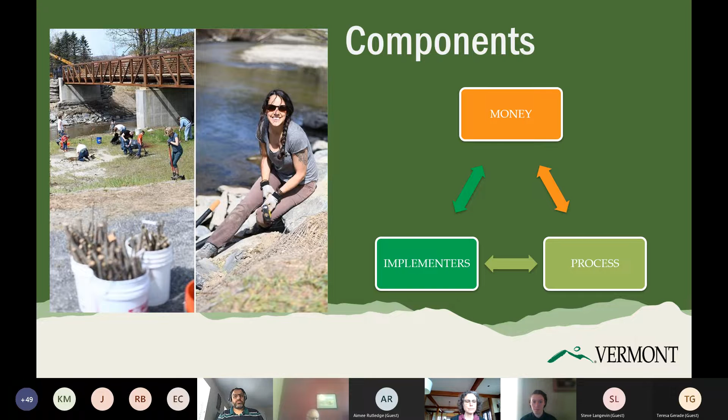Going through the components then: money, we've got that. We've got the Clean Water Fund, and Act 76 ensures it's a dependable source for the next phase of a project. But when it's not enough, the project lead, the implementer, needs to use the award to leverage additional funds. That is happening and has happened. In the accounting, we were able to show that the clean water funds have actually leveraged 50% of its value from other funding sources to add to projects—that's $1.75 million leveraged since the beginning.

You start with assessment of an area known to have high pollutant loading. So you identify the projects, meaning sources of pollution, followed by identifying the best projects and prioritization based on ability to meet the clean water funding goals. The planning includes determining the feasibility of a project idea. Then once that looks okay, you head into design, and from there, grab the shovel—it's time to implement.

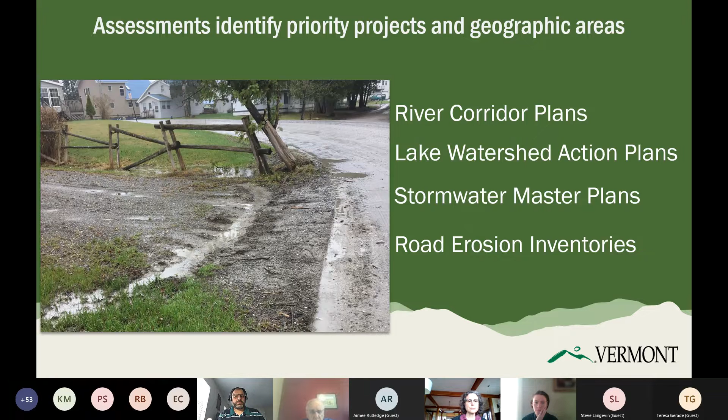All right, let's talk more about the project implementer, who I'm calling the lead now because that's what they are. They are the active party, but they play a role of coordinator because they're working most likely with other entities to ensure they've got all the necessary resources and assistance to address the criteria I identified previously.

Then the other hexagons include technical support, which is anything from additional assistance for permitting to design to implementation. And community connection, which is essential for ensuring that we're going to get a landowner and someone to help support maintenance of the project. Community connections are groups that know what the landowner might need, understand their concerns, and help to address them.

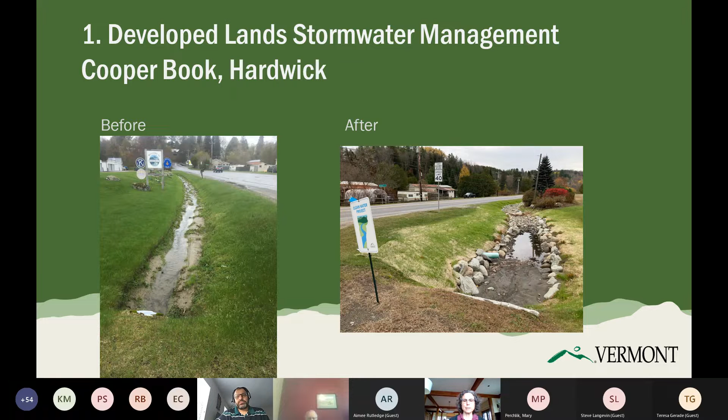First, it was necessary to find partners or work with partners. Here is a list: community connection—they were community connection in themselves, but they were able to connect, and the town in turn was able to encourage landowner interest once their assistance was gained. Then there was VTrans, an engineer, and DEC water planner Daniel Ozarski, who helped with technical assistance. And then financial assistance was, I think, mostly the Clean Water Fund.

So now I'll describe how the NRCD carried the project through to implementation.

The first step in the process: the NRCD led the development of the Hardwick Stormwater Master Plan that identified the project. DEC supported the development of that assessment by providing the template and funding to hire the engineer. The NRCD involved the town in this assessment, which led to their interest in providing additional assistance through to maintenance in this project, and they were also helpful in ensuring that other projects were implemented as well.

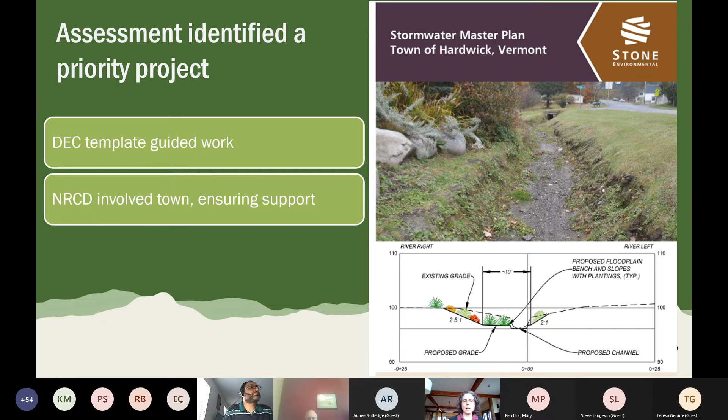The project was identified in the plan as a top priority with high pollutant reductions. Coordinating with the other partners, they needed to develop the project idea from the Stormwater Master Plan to implementation. They hired a consulting engineer to develop the design, which worked off the Vermont Stormwater Manual. In having to consider the landowner's interest, they were able to build trust with the landowner, Carrie O'Brien, who was a conservation district manager at that point, was able to do that through her previous connections.

The private landowner who owned the storage units in the ditch was understood to be concerned with the fact that they were constantly filling up and dumping with sediment, and aesthetics was not something they appreciated, so they were able to be brought in. VTrans, who at one point was supposed to be maintaining the ditch, was also very interested in the project and agreeable to it. The NRCD just had to work with them to ensure that their regulations for working in the right-of-way were met. With everybody improving and benefiting from it, it became a project that could be designed and implemented.

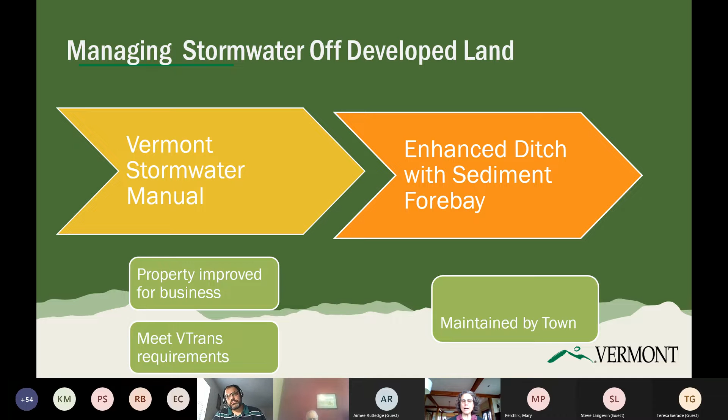The next project is the town forest road BMPs, or best management practices, in the Lamoille River in Westford. In this project, it's the Westford Town Commission who led at least the initiation, and then brought in other partners to assist. They addressed the erosion off of some historic logging roads and farm roads on a newly acquired parcel, the town forest parcel of Maple Shade. The resulting improvements included installation of forest road practices to manage stormwater runoff, which led to reduction of sediment loading to the Lamoille River.

The Town Land Management Committee, as lead, collaborated with these partners. They had their connection to the community, which was great. The Conservation Commission and Trails Committee were both involved. Technical assistance was mostly provided by the Department of Forest, Parks and Rec county forester, Ethan Tapper, who then brought in the Vermont Youth Conservation Corps, and the Vermont Land Trust also had some requirements that helped lead to the project. The Clean Water Fund provided most of the financial assistance outside of people's personal involvement in land.

So how did they identify the project? Well, it was already known that the forest had an extensive network of historic logging roads and farm roads that were eroding and contributing to an eroding gully as well, and these were going to become the town trails. So the assessment was the first step in helping the town prioritize this work.

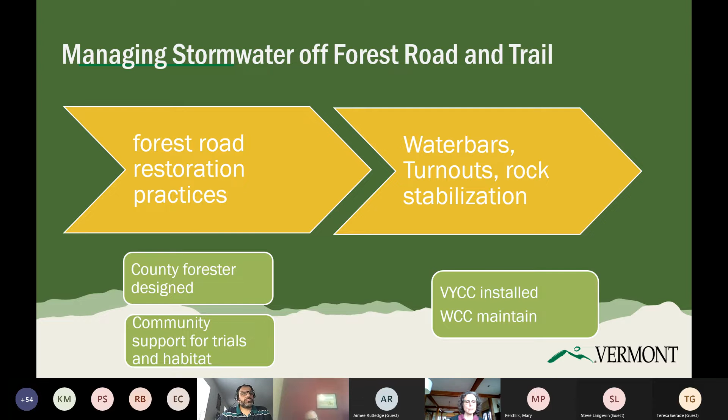Next is the Floodplain Restoration Project, led by the Lewis Creek Association. This project reconnected Beecher Hill Brook, a tributary to La Platte, to 1.3 acres of floodplain, as well as reforesting the area. The Association's efforts also led the town to eliminate in-stream gravel removal.

As a result, the brook and its receiving stream, the La Platte, are better able to work towards equilibrium conditions, which will reduce sediment loading to the river and provide more protection to the town from flooding, since the town is downstream.

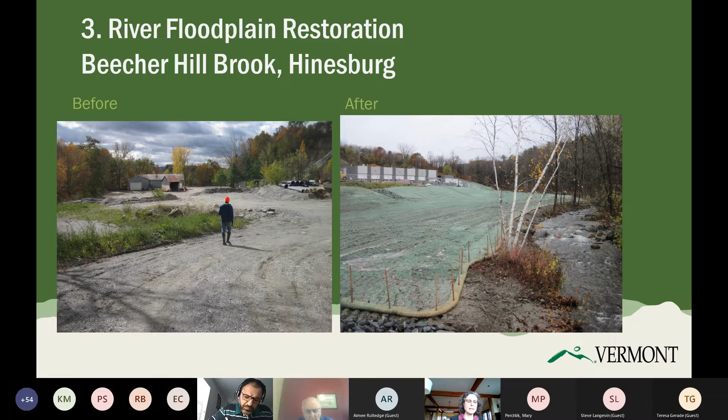They were the lead but collaborated with other partners to ensure success. Hinesburg, as a landowner, was brought to the table by this group, and LCA had the time and patience to make sure the town was committed. Technical assistance came from the DEC Rivers program and a consulting engineer, and financial assistance from the Clean Water Fund, the town, and Chittenden County Solid Waste District.

So the assessment, how do you get to the first step? Earlier they coordinated a study following DEC templates with agency funding that identified Beecher Hill Brook as disconnected from the floodplain by management practices at the town garage property. This stream corridor plan identified the project as a high priority, and LCA decided in 2007, when it was first released, to prioritize it.

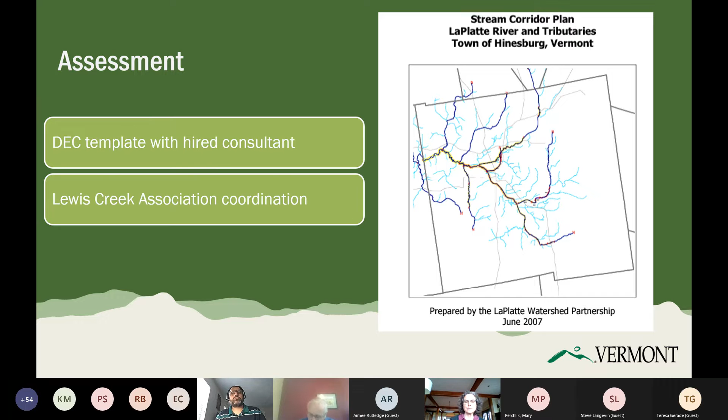The second step is design. This included developing the town's interest as a landowner, having them participate in the project, and meeting the DEC River program needs, since working in a river involves regulatory sideboards.

They brought assessment information about flooding risks and benefits of the proposed project to the select board. It took additional meetings, but the select board ultimately decided to relocate the garage due to flooding potential, along with the Chittenden County Solid Waste Drop-Off Center. It took further time and continued presence of LCA at select board meetings before they agreed to include floodplain restoration as part of the garage removal project.

Once agreement was in place, as the town proceeded with removing the garage, LCA obtained funding to hire a contractor to implement the floodplain restoration project and worked with DEC to ensure it incorporated river science. They had the town incorporate this work into the final project, which included the town no longer removing gravel from the stream, working towards equilibrium, and the town committing to maintain the area.

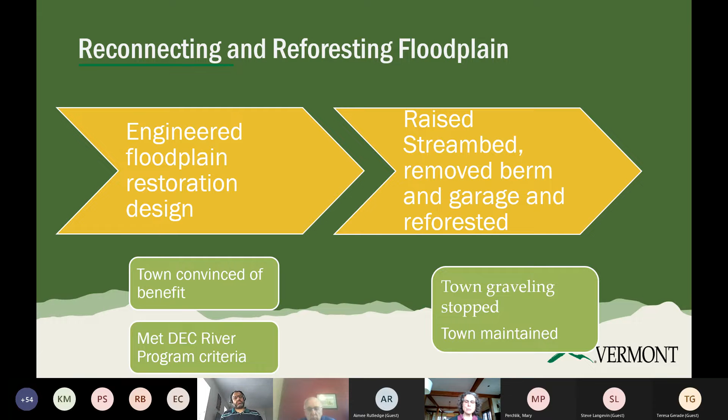Fourth project: now we'll go to shorelines, to lakes. This is a project on Lake Raponda, an example of how shoreline restoration can be coordinated by a lake association and their partners. The project is led by Lake Raponda.

The project included both road work and stabilization of the shoreline using bioengineering techniques, which resulted in reduced sediment loading to the lake. Bioengineering techniques mean using trees and shrubs to stabilize an area over the long term.

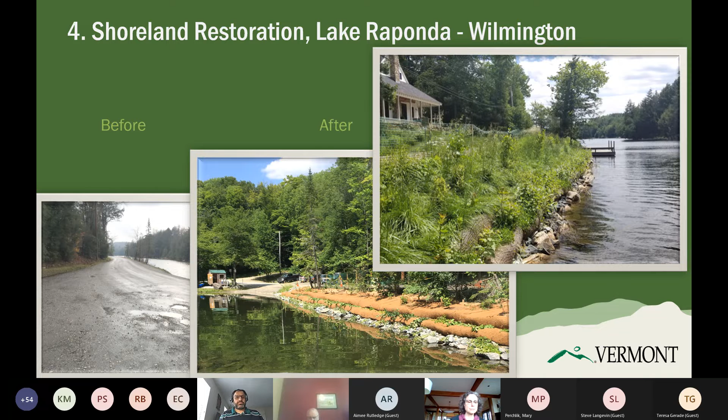The project also resulted in stormwater management practices that were installed on dirt driveways and roads, which included open top culverts by the beach and stabilized culvert headers.

The association, as lead, built the connection with the town and shoreline owners so they were able to find willing landowners to participate in project implementation.

They received technical assistance from Vermont Youth Conservation Corps, DEC Lakes and Ponds, DEC Watershed Planning, Marie Caduto, who was a planner, and Amy Peacock helped from Lakes and Ponds. For financial assistance, they had two different types of Clean Water Fund grants: one through VTrans for erosion inventory, and then the Clean Water Fund that funded the work crew.

So the assessment: first step, where are the problems? How did these projects come to be? They did both Lake-Wise assessments as well as a road erosion inventory that used DEC templates and clean water funding.

The association worked with Amy Peacock of Lakes and Ponds to offer and provide Lake-Wise assessments to shoreland owners, where they then identified projects to better manage stormwater runoff and reduce erosion. They were able to look at 17 sites.

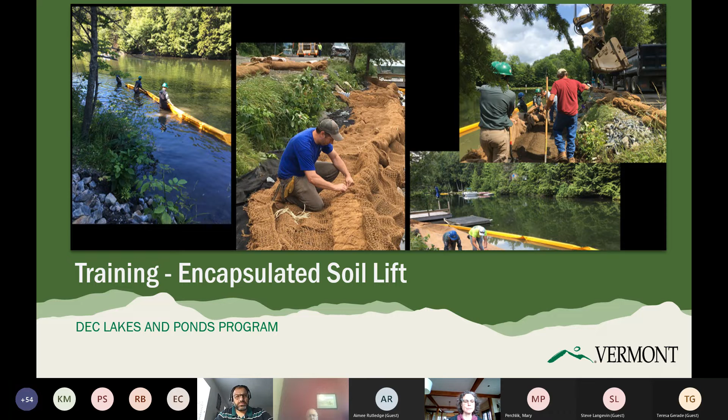Lakeshore restoration. We know what we want to do. How did it actually happen?

The association with partners were able to obtain landowner interest through use of the Lake-Wise program, which awards shoreline owners for good shoreline stewardship practices. So it's a reward system.

They obtained the town road foreman's interest in participating in the road erosion inventory and agreeing to the resulting bioengineered shoreline project.

They used the Lake-Wise program designs developed by DEC Lakes and Ponds to ensure that the projects would be designed to successfully reduce sediment as well as enhance habitat to meet landowners' interests. And then finally, working with DEC to ensure state regs were addressed.

The implementation was achieved through hiring the VYCC, the Vermont Youth Conservation Corps. And after they were trained, they were the perfect contractor here.

The final and last step in the process was successfully obtaining the town's commitment to maintain the work adjacent to those town roads. And of course, as they were brought in early on, that was something that was easily done, hopefully easily done.

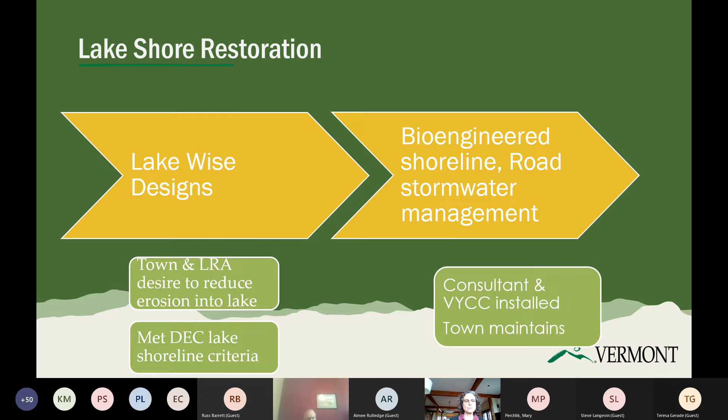Fifth project. So this is the last, a complete overview of a project. This one is associated with river corridor protection and riparian planting, since it happened in the upper Missisquoi River in Lowell, Vermont. This project was led by the Vermont Land Trust.

The farmers also worked with the Missisquoi River Basin Association to plant 621 native trees and shrubs to reforest the banks and the corridor itself.

The river conservation allows for the natural movement of the Missisquoi towards a less erosive condition and increased connectivity to the floodplain. It's a passive practice.

So Vermont Land Trust leads, but they're collaborating with others.

Community connection: they already have a connection with that community, the farming community in the Missisquoi, but they also brought in the Missisquoi River Basin Association that can provide that as well.

Technical assistance was the DEC Rivers program. Staci Pomeroy is the river scientist who helps out in this area. And then Clean Water Fund, but also Vermont Land Trust supported their initial assessment.

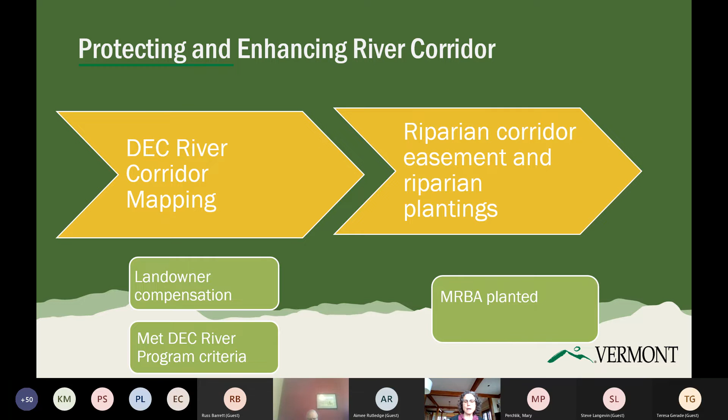And the dam task force is actually a collaborative effort in itself. Most of these people and entities are part of that task force. They meet, they talk, they help each other enhance or improve the process. And then, of course, other stakeholders, including the landowners, 5 contractors. It's a mega project, but they did it. It took them from 2016 to 2021, but it happened.

All right, so supporting the collaborative process, it happens at the ground level. A lot happens all over the agency, with people, staff and organizations, including the watershed planner like myself and the others in the state - state field and permitting staff from the Agency of Natural Resources, Agency of Ag, and VTrans.